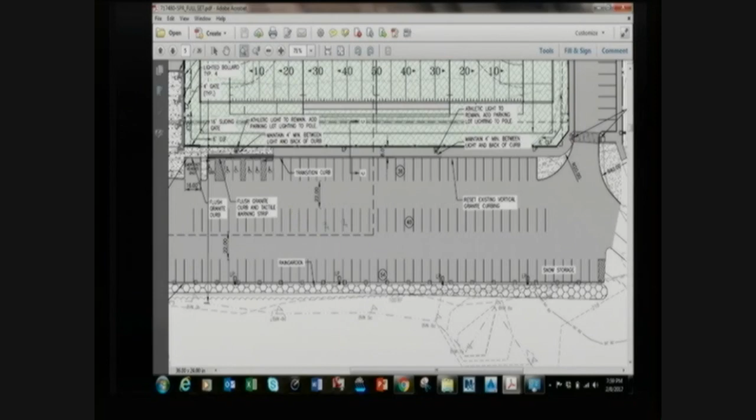So again, it's the same field configuration with all sports on there. Left field at 185 for the foul poles. The building configuration is the same spot, same size. We are showing the parking configuration, same as I think we were showing it before, with 130 or so striped parking spaces down there. We've got accessible parking here.

One change I will note in this area is we used to have the vehicle access right over here, so you had to drive through one of these columns and make a really hard turn in. We changed that to here, so you come in just straight in from the parking lot, which is a way easier movement to make. And that's why we have this little island here.

So we're separating that from the handicap parking, and there's also a little bit of a grade change there, a little curb ramp back down to get to grade. There'll be a sliding gate there, 16-foot wide, that'll slide this way. You can open that up and just come right on here, so you don't have to worry about that anymore.

We're showing a ticket booth here, and we're showing a concrete area. This gray hatch is supposed to represent like a stamped concrete or a colored concrete, just decorative paving, for aesthetic. We have five columns we're proposing like a brick-faced column with a decorative cap on top, like a pier. And then we're showing these other kind of blanks here as just flat, like paver blocks or something that would be flush with the ground, but it would give it some interest in that area.

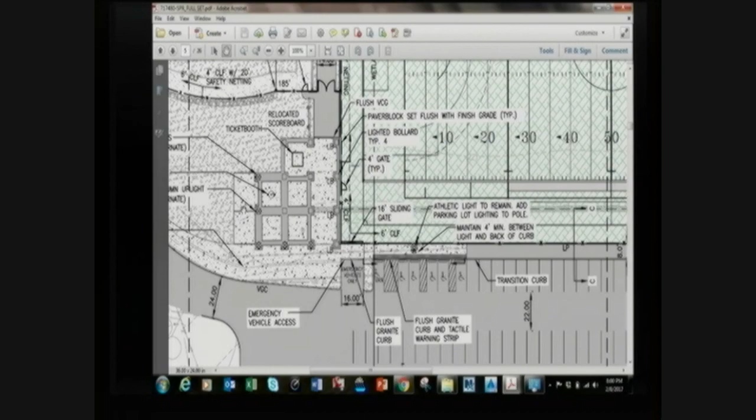We'll get into costs later on. There are some value engineering kind of cost-saving options that I think we need to go through. These pillars and this kind of area, there's some options for some cost savings, I think. That's really the nicety area here. It doesn't have a lot to do with the program, but it's a really nice feature if you can get it.

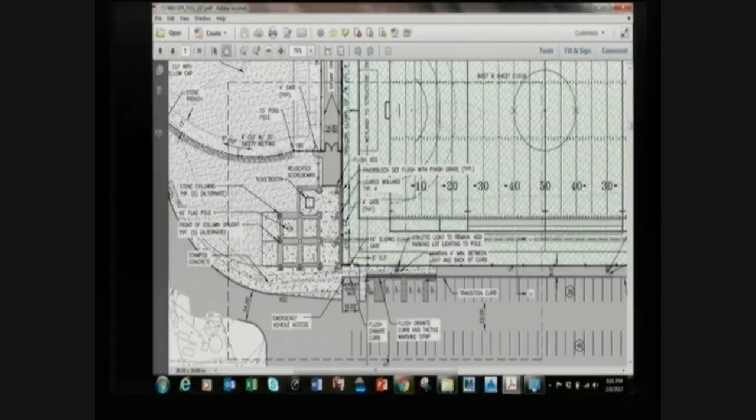So again, just going back, the emergency vehicle access, I'm kind of thinking through this. If we were to remove the bollards or the piers, whatever we want to call them, and leave the gate over there, at first I was thinking that would be my wish initially. But now, thinking through it, you do have to go over an area where people may be congregating, a ticket area where there's going to be pedestrian traffic. I think this is the best place in this corner of the field for that type of use anyhow.

Was there an impact on the cost estimate? No, cost neutral. It's basically moving the gate here and putting it over here. There might be a little bit more curbing or something like that, but I don't think you'll ever see that difference. So once they pull through the gate, they can just go around the field, drive wherever - yeah, you can drive on the field.

And there's another gate on this side here as well. Based on some feedback we had gotten before, we made this movement a little easier too. At one point we had the gate maybe over here, so you had to kind of come and make another weird hard turn there. So we have this whole area fenced in, we've got a curb cut so you can get up the curb, and we've got another sliding gate here, and then another sliding gate here. So you're basically just coming right in - it's a nice smooth movement there.

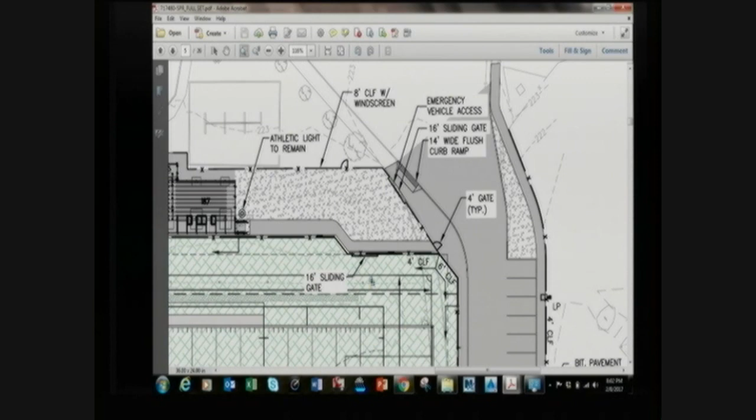Talk a little bit about the grandstands. So, like I said before, Chuck was involved and Carl was involved.

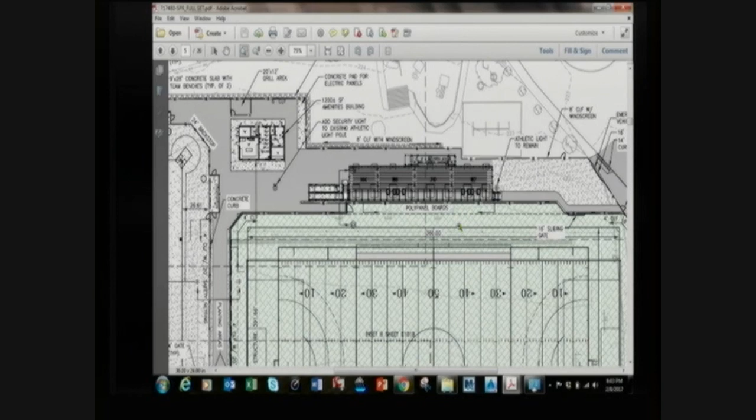The issue we had was that with the configuration of the grandstands we were working with, in trying to keep this light pole, which is currently there, in place, we weren't able to center the grandstands on the field. So we reconfigured it so that we could center the grandstands on the field.

But in order to do that, we needed to reduce the size of them, and at one point we were down close to like 600 seats. And we got it centered on the field.

Don't pay attention to this dark line here, that's something else. It's really this 50-yard line that comes straight through this section and then straight through the ticket booth, so it is nice and lined up here. Press box. Going right there for tickets.

The decision was made to not move this light. It would have been a cost to do that, and then it would have also not been symmetrical anymore with the other side of the field, so you theoretically would have wanted to move both. It was a ticket of like $40,000, I think, to move those poles.

So what we ended up doing was we kept that smaller configuration here, but then we added on another section on the left-hand side. So the press box is technically off-centered from your whole grandstand, but there's a local center — the press box and center section are centered on the field.

One thing I noticed is the center section previously had you entering from behind. So in order to gain seating, we're now just entering on the ends?

So we have an access point here on the end, and another one here. This one's going to be more for egress.

Although we're not showing it completely accurately here because we're going to pave — you're still going to be able to walk underneath this whole thing like you always could. We're going to bring this pavement out so that you can walk underneath and access it here.

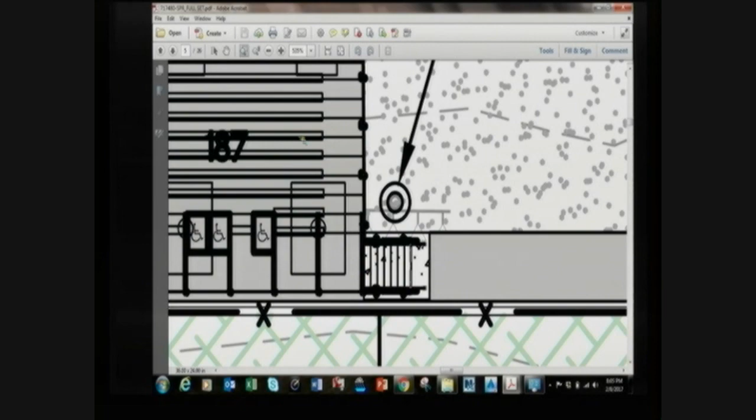If you wanted to get a little more exercise, you could come down here and go up that staircase instead. Or you can just come over here — there's a staircase here to access this. This is an elevated platform; it'll be elevated about 42 inches off the ground.

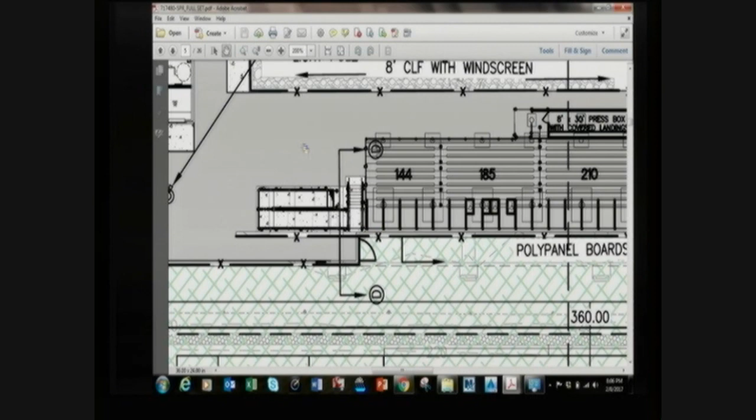So you access that here, and this is your accessible ramp, which comes up here as well. So you really have two access points, just one on either side now, but you still have that whole open space underneath.

So I think it looks pretty nice. It's a little atypical, but working with the site constraints that we have, I think aesthetically — you're looking at that center section, you're looking at the press box, and you're on the 50-yard line.

That's actually the way the Littleton community has typically watched sports at that field — there's a big pile of humanity down on this end, and a smaller part of humanity out to this side of the bleachers. I don't know why, but that's just the way we've done it, so I don't think it'll bother anybody. And actually, you're closer to the amenities building at that point, too.

One of the things this will end up benefiting is, with that new section closest to the concession area, the band likes the acoustics from that end of the bleachers versus down where the quote-unquote fan section is at the other end — so it'll keep the band and the band director happy.

One thing we did need to do when looking at this was, we always had this little bump-out here. At one point we had that at 10 feet, and we needed to decrease it down to 8 feet in order to make this work. We wanted to make sure we had separation from the swing set area, trying to get separation between that.

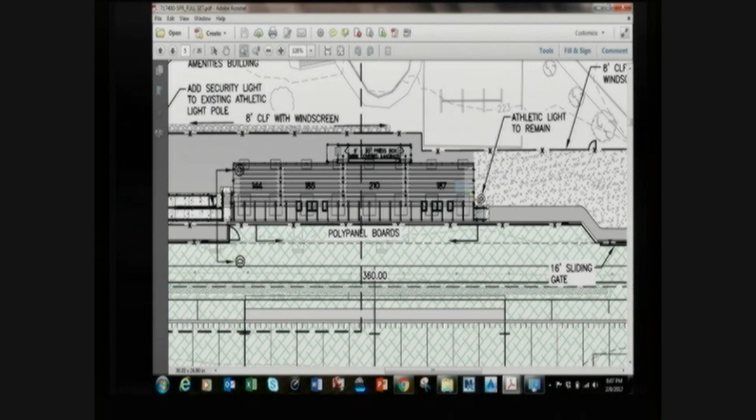See how close we are to that existing light pole? We needed to bring that down away from the light pole a little bit and get a little bit of wiggle room so that we could actually build it. But we still have — you've got your 10-foot run-out from the end line, since soccer is the widest sport that was showing on this.

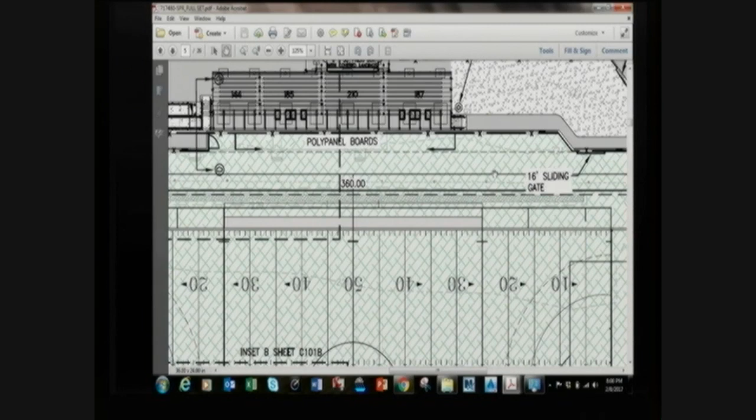So you've got your 10-foot run out to that dashed line, and then you've got another 8 feet after that. So from the end of soccer to the end of the actual turf, you've got 18 feet there. And then another 6 feet for football, because we're football.

Well, quite a bit more, what it really actually is. Cheerleaders are right at that for football games. Well, this is the cheerleader area, so. Well, you can have more for football. You've got a lot more, actually.

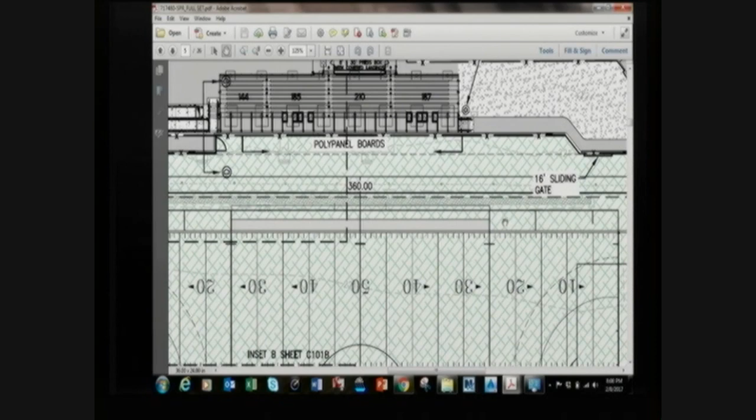You've got about 30 feet, probably like 30, yeah. That's plenty. You probably get about 36 feet between your football line and the edge of the turf there, the front of the stands. I mean, this is the coaches area, you're down past the players team area. So you've got quite a bit of space there. Okay, good.

Okay, I want to zoom in. I want to go to another sheet here just to talk about this area. Here we go.

Nice being able to zoom in and not have boards and have people from 30 feet away trying to point at it with my pencil.

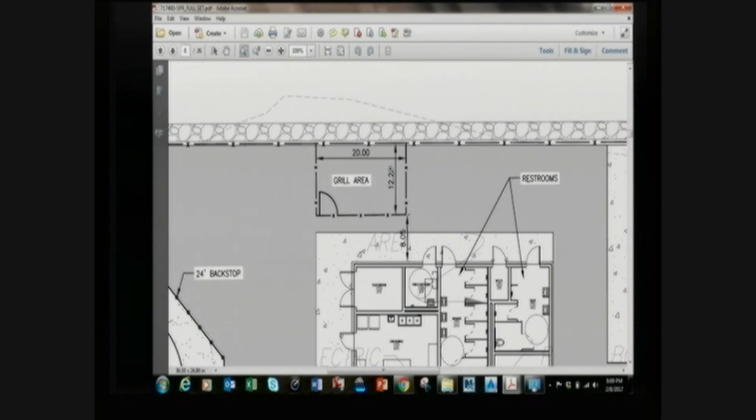So we've got the amenities building, we've got the few windows here, apparel and the concessions, and then your restrooms behind here. We did add in a grill area, which we had talked about at one point, fenced in with a gate. I think our utility plan shows a light pole in there as well, so you can actually see what you're doing at night. That'll be new.

And then as far as the softball infield area, we have our basically enclosed, we'll call them dugouts, but it's really an enclosed fence area with a concrete pad and a player's bench. It's really just no roof structure on it. And really, if you wanted to ever add one, you could probably easily do that down the line, 'cause you've got the concrete pad there, you could set one right on it. Eagle Scout project, yeah, something like that.

So what we're doing there, and it's the same for both sides, is the whole thing's fenced in, so the fence comes down the line here with safety netting down that whole third base line. We're putting in a gate so you can actually get into the field, we're putting in a gate here so you can get into the dugout area. We've got a gate on the other side so you can get in from either side, in or out. And then we've got a 6-foot chain link fence in the middle with 3-foot openings on either side, no gates or anything, which is fairly typical. And again, the other side is just a mirror of that, for the most part.

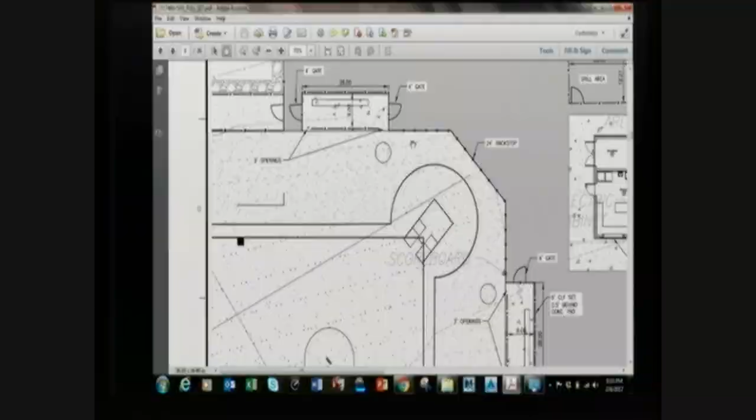We've got a 24-foot backstop. We do have some presentation materials that we can show different options for backstops, but typically what we think of as a clean look is to do just a straight vertical backstop without the overhang. It's kind of a cleaner look, and the overhang actually adds quite a bit of cost. It can add like $10,000 of cost, which is kind of crazy when you think about it. We're good.

What else? Let's see, can you just bring us down the right field, yes, there you go, the old entrance area?

So we did add in this, it's a 12 by 60 foot, I'm calling it a warm-up area slash bullpen area, so that's inside the fence to the field. Yeah, it's fenced in, but there's a gate here. So spectators are on one side of it, the field is on the other side of it, but you have an area where pitchers could go out and warm up with the catcher and then protect it. Yeah, exactly.

And we could have made that a little bit longer, but we've got that main gas line here, the main water line, electric line, and we're really trying to be careful about where we put fence posts over there.

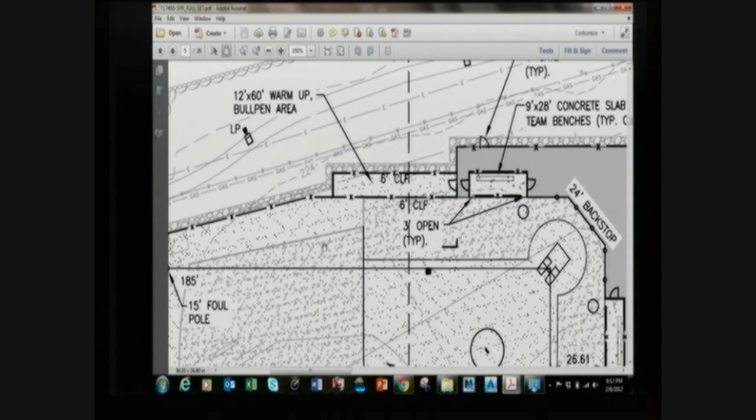So, and what we've done for the infield is, at one point we had this whole area here as a skinned clay infield. But after some debate in the office of the best way to do that from a drainage standpoint and just maintenance and aesthetics, what we went back to was having a grassed area around it. What I didn't want to have happen, because the way that this thing drains, it drains towards the edges and towards the backstop, and if you've got clay draining towards your pavement, you could have it wash out on the pavement. It could be kind of messy.

The downfall with having the grass here is that some people think it's a bit of a maintenance issue. It's a little bit hard to mow and maintain it, and it gets a lot of wear. But I think it's the better of the two options.

Is it? The grass in that area, yeah. I see it both ways. I see a lot of it being grass, and then I do see it sometimes just being all skinned in clay.

So we are showing that warm-up area as clay, because that's going to get a lot of abuse. I don't think grass could really live in there. And then we're showing a clay warning track around as well on the outsides here.

We've got a stone trench drain along the outside for drainage purposes. Again, we're showing that safety netting 20 feet tall here, safety netting 20 feet tall along here and along the other end line.

What we're not showing is sometimes folks want taller netting behind the field goals, because the 20-foot netting will catch some field goals, but it won't catch all the field goals. Not an issue for little kid field goals. I think I mentioned that once before, but it would be an issue though. We're pushing the budget as it is, so if it is an issue, we've got plenty of little kids that love to stand behind the goal post and shag, so believe me, we'll be fine.

So that's pretty much high level right there. One more thing, just to touch on this parking area here.

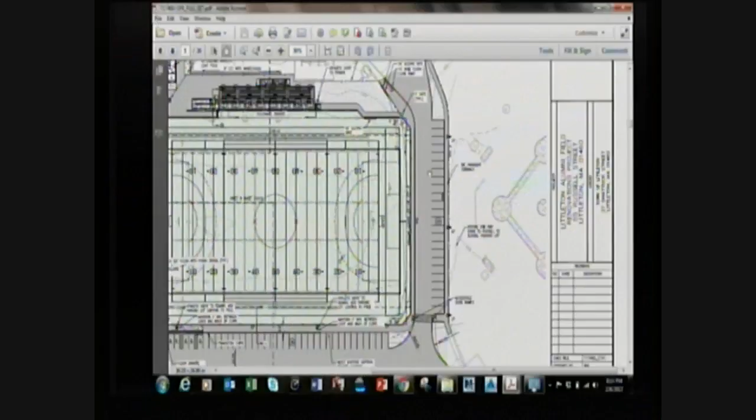I don't remember where we were the last time we met with this group, but there was at one point some discussion of whether this was going to be parallel parking, or were we going to do perpendicular parking where we'd have to shift the road and put the parking back in place. What we landed on was to do perpendicular parking. We were able to get twice as many spots, and it's easier to perpendicular park than it is to parallel park.

Oh, good. Yeah, for a while we were showing permeable pavers along this whole southern edge here, and we were trying to think of ways that we could detain or treat stormwater coming off of the pavement. Although it's pavement now, we're putting new pavement back. We need to manage that to the extent practicable.

There was some concern, I think facilities was concerned with it, and even conservation was concerned with it, as far as maintenance, and there were just a lot of issues with having the permeable pavers there. So what we did was we took them out, and we are proposing a rain garden, which is basically a little depressed vegetated area off the edge of the parking lot instead, which I think in the long run will actually probably function a lot better.

And ConCom, as well as the highway department, preferred this over what you had before. I think it's going to look nicer, and it's going to provide more benefit. So that's what we're showing there.

We're showing a timber guardrail along there with some lights. We've got parking lot lighting here, and here. We've got lighting in the entranceway. We've got field lighting here. We're going to do basically a floodlight somewhere over here just to get some light on the infield, not for playing, but just for security.

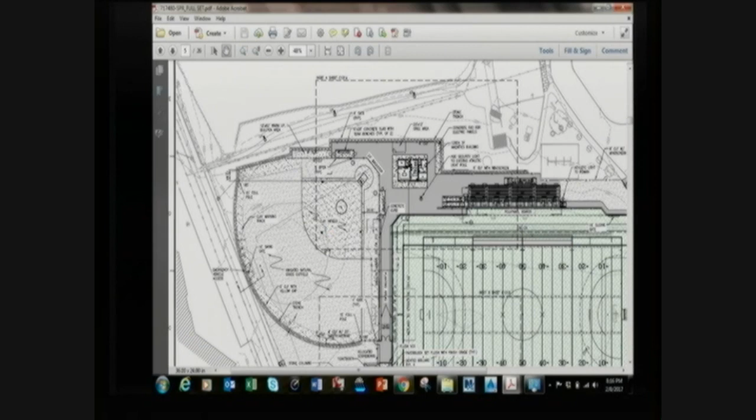At one point, someone said that during games, sometimes kids like to go out there and run around. And then we've got some pathway lighting back here as well. And then we're going to have wall pack lighting around the perimeter of the building so that we have nice light over here for accessing the restrooms.

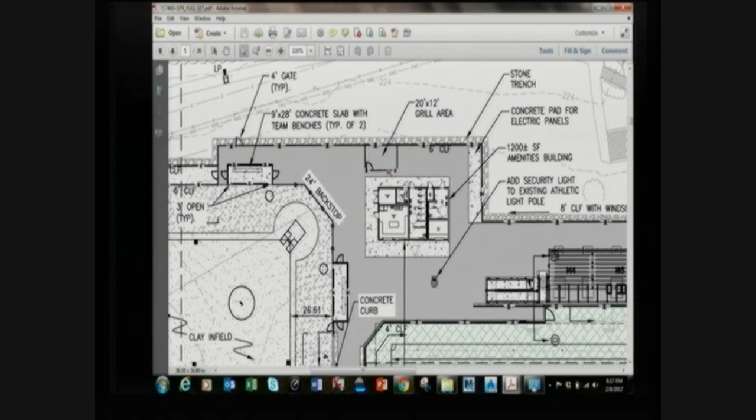Just want to leave that up, John. Sheila, do you see with the grill area, John, if you could, behind the concession area, they designed a little fenced-in area for the grill area? Oh, that's good.

That'll be nice. I think it would make sense to turn over to Sal. We do want to come back and talk about details, but I don't want to get hung up on that and not have a chance to talk about building stuff. I just want to get the input of the board as to that bullpen area that you added. Yep.

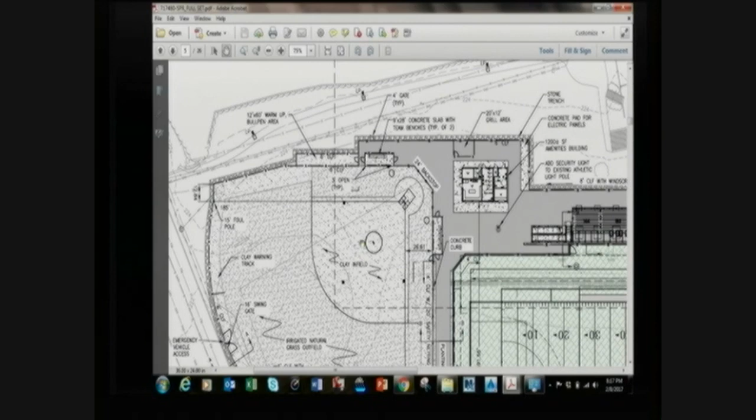On the third base side, in theory, if there was a pitcher warming up, they'd come out and down to the outfield grass here and warm up right along here, with somebody protecting the pitcher or catcher, whoever's back was to the batter.

On the other side, there was some conversation from the softball folks about where they'd be able to warm up their pitchers. So one of the things I was proposing was to kind of square this off, not necessarily create what you've created here, but more square this off.

But one of the restrictions you said was the utility lamps. Did I step on you? You're wrapped around the HDMI cord. Awesome.

I just wanted to throw it at the board to see if that's going to be kind of like a little alley, and I don't know whether or not that's going to be beneficial, to have that alley there.

What's the alley? It's a clay area, coming out of that dugout, and the warm-up area where the pitcher can go out and warm up—just throw with a teammate to get ready for a pitching change or what have you.

Right now they basically go out into the outfield. There's a ton of space, but along the third base line.

So what's the question—is the bullpen good, should we keep it? I guess that's what I'm proposing to you guys. Do you think softball wants to keep it fenced in? Yes, I think having one fenced-in area for people to warm up in, we don't have to worry about anything. If it's built in and the cost is there, I think we should do it.

That was one of the biggest reasons it's kind of 50-50 when you talk to softball people, if they like the field the way it is. The people who didn't like it, or weren't concerned as long as they didn't lose a field, their concern was that they had no place to warm up. So I think that's a good addition for the softball people.

That's certainly a benefit for the first base dugout. Just gotta make sure that's up against our fence—there's no home side way down there. We don't want to, I mean, you say that and you're liable, but there's no reason why, if it wasn't being used by that team on that side, the other team could make the sojourn over, and it is separated from the dugout, so they could do that.

You know, having one is better than having none. Having two would be ideal, but that's not gonna happen. So let's have one and they'll work it out.

You put one of those net things up, like the high school has, on the other side? Is there anything that would stop them from doing that, like a batting cage or a pitcher warm-up area? It'd be in the field of play, right, so how are you gonna warm up your pitcher then if you're in the field of play?

Well, like they do now, they go out deep, go foul, out in the outfield, and they just have a spotter. There's plenty of room. From an actuarial point of view, in a youth softball game or even a youth baseball game, it's fine—it's not like they're smacking the ball and yanking foul balls all the way down to the corner that's gonna rip somebody's head off. It's just rolling, if it ever gets there at all.

I feel like if softball's happy, we're good. There's some electrical over there for a pitching machine, and water to hose down the clay.

With some of the issues that—well, this whole softball field will be irrigated, so we can either have quick connects to water down the clay, or we can have them design it so the clay is automatically irrigated.

And we could do it either way. It's a little bit of an added cost, I'm sure, to irrigate the infield, but I think what they typically do is they just have larger heads around the perimeter that shoot inward. So I don't know if you guys have a preference.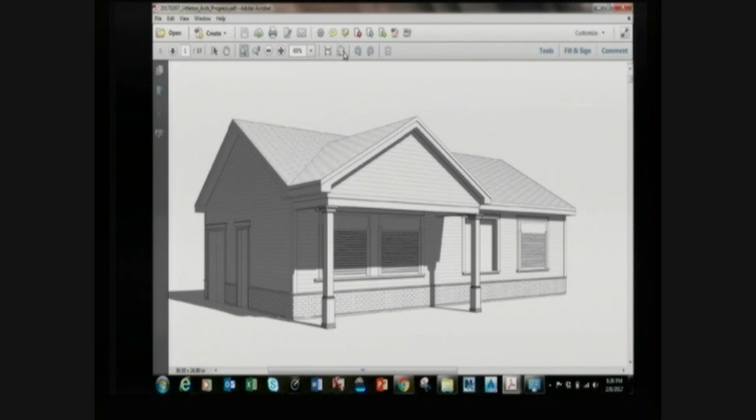Okay, so then these are just sort of the construction set as it develops - typical mounting heights of things, kind of regulatory pages.

So then getting to the plan as it's evolved, we got the comments from last time. We've removed the counters that we were showing before, because we were directed that it's just stainless steel tables. Yes, we just have to confirm some of the sizes and work with you as to the layout.

As to what sizes - I don't know, do you have them already? We already have them in there, yeah. Okay, so if you can get the sizes of them, we can show you how they lay out, and it might mean you want to buy another one if we have more room, but at least show what you have currently.

I can show you the interior elevations of the room so you can see what wraps around it, but just in plan there's a refrigerator, a freezer, hand sink, 3-bay sink. The grease trap will be mounted on the floor here.

Anything we could put shelves on standards there, or we just thought that maybe, depending on how you're gonna display - there are hooks on the wall, slat wall, is it something that's done afterwards? Is it something you want us to program and show what it is, or is it this group or someone else we need to get input from?

I think we could figure it out, I'll get input. I know Gary - yeah, I think Gary runs the apparel, he'd want to figure out what he'd want to do. It's something easy to do afterwards, but if we want it in the contract, we just need to know what you want. Right.

What's the finish in there? Is it just drywall? Yeah, it's all drywall. Everything inside here is impact-resistant drywall.

If he wanted to add shelving, they could easily do at least one wall with shelving to store on, whether it's wire shelving or not. The only thing I'd say about wire shelving is if you're going to buy units, you could get them for about half the cost of what a contractor would charge. So if that's the solution, just box them and get them afterward from Uline or your supplier. The town's probably got a contract with them, and you can get those things a lot cheaper than what a contractor is going to charge.

Even the stainless steel tables, when we do those, we tend to recommend keeping them out of the contract. If you have to reserve money for FF&E, buy them directly, because there's a big markup that contractors put on them.

So quick question though, I think we discussed at one point too, the concession for the condiments being over on this side. Over here? But I'm not sure how that will work.

So right now we put a folding table out, which could still work with this counter here. Why would you want it still over there? Just because we've always put it over there?

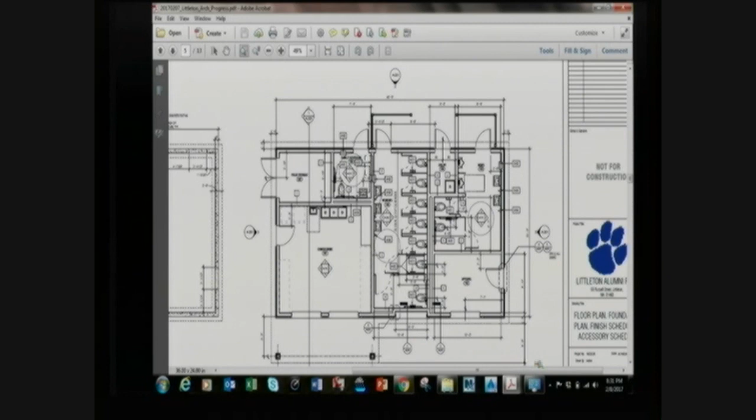No, not just because of that, but I'm thinking about the flow of people and getting them out of the way. Like they come, get their stuff, and then go over there to the condiments. If you leave it to the right, they get their stuff, step off to the right, do their condiments, and then head back to the seat, keep going to the right. If you put it over there, they've got to go there and then walk back across the line to get back towards the bleachers.

That's true. All right, and if we have that built in, we could still put the condiments there, you don't have to use a folding table, but it gives us the flexibility of doing that rather than building it in. And I'd say if you build it in on this side, you're going to lose space out of the concession building. Here we didn't lose space because the restrooms behind it had some extra space in them.

Okay, that looks good.

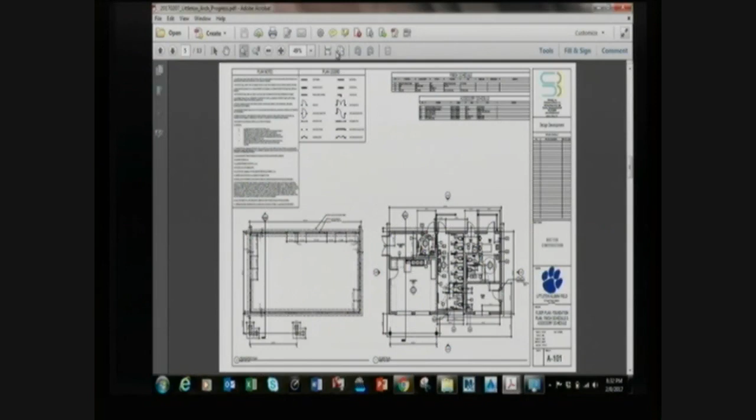And the exterior on that wall that Sheila was just talking about—never mind, I got it right here. Never mind.

This is the ceiling plan, which is very basic. The soffit underneath the canopy, we'll show some lights in here—just notice that they're not there yet. But all of the ceiling is drywall in the concession building, which tends to be more cost-effective than doing ACT.

But we will show an attic access hatch, not a pull-down stair, but at least a hatch to get up there to service the units. We'll probably show that in the middle of the storage room, or we might put it in this area here, in the apparel storage, because we want to get back as far as we can to the high part of the roof, and rather not put it in the restrooms. So we'll have to check in section, but probably would put it around this area here.

So the highest part of the roof is in the middle, right? Right, so it gets higher here than it is in this room, so you have more headroom when you come through that hatch.

You don't want to do it in the concession area? We could do it in the concession area if you wanted to, I don't have a preference. But if you're looking for the highest part, this would be the best place for it, to have the most headroom when you came up into the space. Sometimes people don't want it in the concession area since it's not something that's accessed very often, but if you have to change filters in the fan units that are up there, so there will be some access.

Get boots on your sinks and countertops. I mean, it would not be accessed during the game, right? Sure, no, no, of course not.

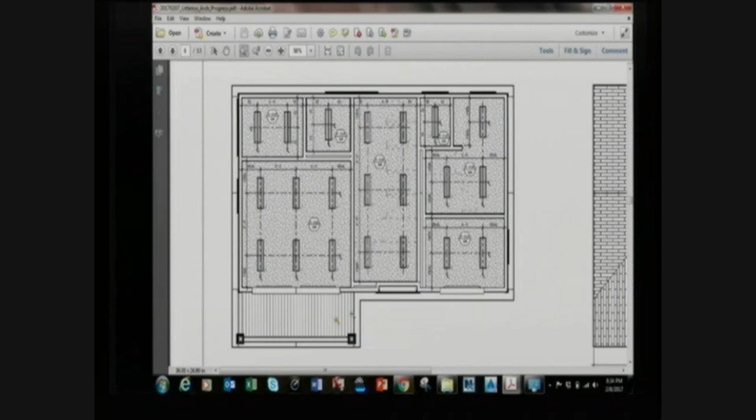And then the ceiling here, it's like AZEK, PVC soffit boards, with some can lights.

How much coverage is over the... that's just over the two service windows, correct? So how covered is it over the condiment area? Just a bump out, just the recess and then about an 18-inch eave. So this is the edge of the eave above.

We do have room over where you were looking to put it, Sheila, if you're thinking of foul weather. It's fine where it is, I'm just looking but if we did decide to put it on a rainy night, if you wanted to put condiments out, we could do one of the pop-ups we have, and put a table underneath that. You can even put the pop-up here next to this. Right, I was thinking of that, if you're on a rainy day.

Then this is the ticket window as we have it now. Currently, I'm not sure I'm a fan of this, it's what's in the drawings. Because these are sliding windows, your transaction area is kind of small here, so I was thinking maybe just a double hung window might be more appropriate, or we could do a casement window that opens all the way out. Something that's not like the ticket window, sealed with the hole, something that looks more residential. But looking to you guys as to what your thoughts are.

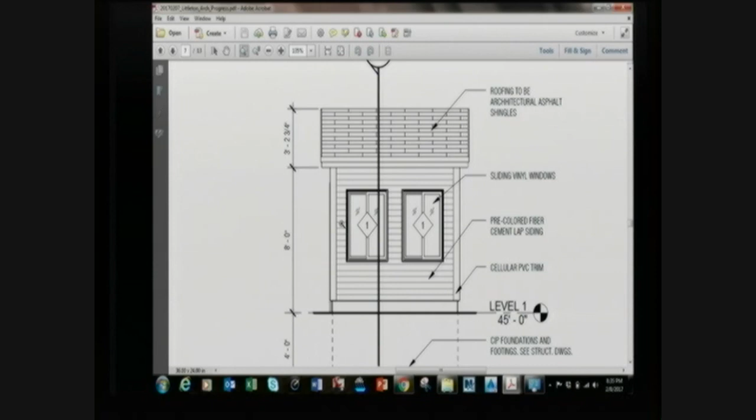We have sliders now and they have to kind of bend down in order, right? So I've done double hung now, and that's always the window debate - do you bend down or is it narrower? Or do you do one bigger window rather than the two? That's another thing you can look at also. I think it's good to have two stations. What if you hang the window higher? That's what I was thinking too.

Could you do a coiling window, Sal? Why not, you could do a coiling window. The window still has to be where it is for ADA, but what about like the concession roll-up window? You can stand taller, and it could be two - a double hung, stainless steel so you can open it more. We could do the stainless.

Then, there can still be two lines, but why not one big stainless steel open-up window? Do you know what I mean? We could do that, so basically it would be the same size - not roll-ups, stainless steel, the same thing as the concession window. Same as the concessions. You do one big accordion window, just one big one with two stations at it. So it would look like one big roll-up window.

Wouldn't give you the residential look. No, it wouldn't give you the residential look. But it would match that though. Well, I mean, when you open it, it's going to be up - it's only when it's closed that... so that is a possibility. It would just be one of these that would have two stations inside it, and it would roll down and seal instead of being glass.

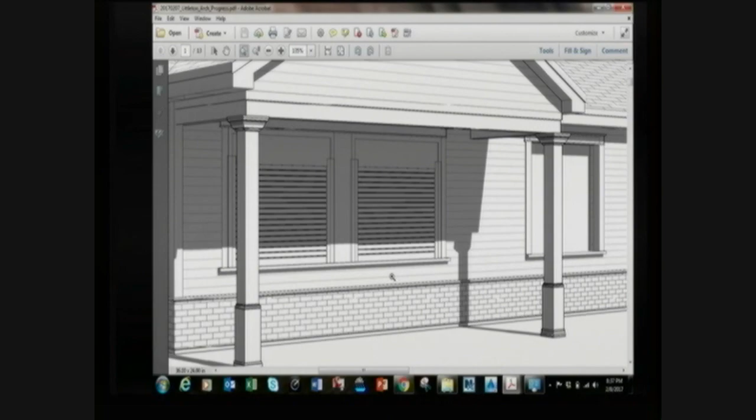I guess it's a matter of aesthetics. I mean, cost-wise, I would imagine that this is gonna be more expensive - probably more expensive. Not leaps and bounds, I would say, not a lot though. And from a logistical standpoint, that might be a lot better, because like you said before, it's either you're on one side of the window or you're bending down. In this case, you're just opening it. There's other types of windows, but they get very expensive - it's gonna be more functional, like a NanaWall type, stadium press box window that folds out away. I would opt for that.

This isn't gonna be ugly, but you've got something sticking out in the way there. And, I mean, you can paint them, right?

The roll downs? Can you paint those roll-downs? You can get them, or you can specify them in a different color. So, can we put the tiger paw on it? Yeah, they'll do anything.

And we could do them all as a color instead of stainless steel. It would be anodized aluminum with a powder coat, as opposed to stainless steel, so they match the trim color. That actually would be pretty cool. Yeah, that would be nice. Great idea, wrap it up.

Everybody good? All of them, even these ones here? I would do it on all of them. Yeah, make them all the same. Anodized aluminum, that's pretty cool. Trim color, yeah, it's gonna look nicer.

Okay, very good. The other thing is, this is always a debate as to which way you pitch the roof. Right now we're showing it pitching this way, and the question was, were we thinking gutters and downspouts, or were you sheeting? How much of a soffit?

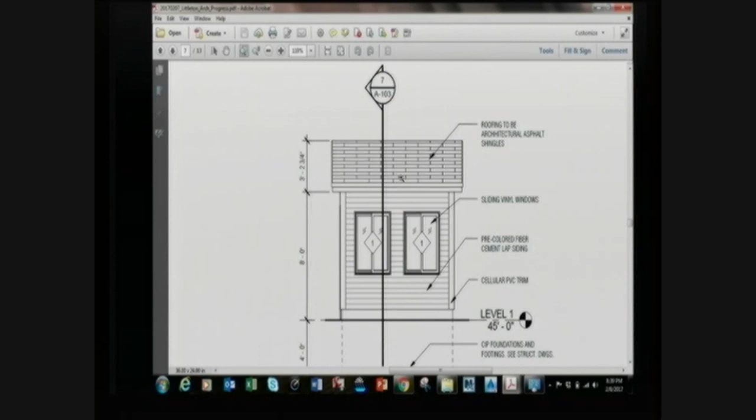The issue is when you overhang the angle part, it's so high above you that the amount of rain protection it gives, unless you go really far, is limited. So there's no good answer unless you really extend the roof like 4 feet and put brackets and columns to really get under cover.

I mean, they're gonna be out in the rain for the next 3 hours anyways. That's kind of... and you're there once, it's a quick transaction, you're done. You know, you can go to the concession stand more than once. Right, more people go at a time, so you want that cover.

But it's also more to give cover to the people inside, for wind, rain blowing into the counter and onto the tickets — it's more to shield them than the person buying the ticket. But the thing that's nice about the roll-up counter is that you can adjust how far you roll it down. It latches in multiple positions, you could lock it at a mid-point, so if there's windy rain, you could bring it down right to your eye level and kind of limit the amount of water coming in that way. So there's a benefit to that.

I feel like if there's a way to not soak people standing in that one spot in line — even if it's just tacking a gutter and directing it, even to people's feet — I mean, yeah, you're getting wet anyways, but like, my 5-year-old's gonna stand under it and then I'm gonna have to leave, I'm just picturing it from that angle. If it's impossible or costly, that's one thing, but if there's any way to not create a shower for people, that would be nice.

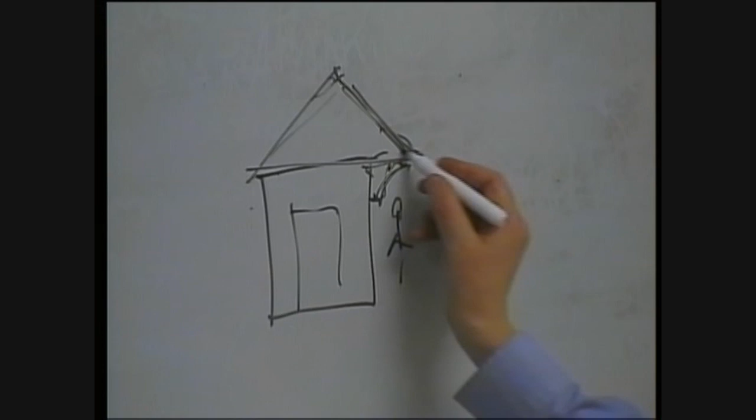I like that better. It's a little bit more money, but we were thinking of making the whole ticket booth an add alternate, just as a package, trying to be sensitive to pricing, so that it's something that could be done later, or removed if we had to. I like the depot design. Okay, we will do that.

Then put a little train in that takes you to the bleachers. Paint some tracks all the way down that little monorail alley system. Monorail, why not? People mover. Good training, they'll hand out umbrellas. Just get some sidewalk, big long golf carts, like Disney, the tow rope.

One other thing that came up earlier was a bottle filler on the outside of the building somewhere, which we were just asked about — is that a donor opportunity, and did we have one? We don't have one currently.

One of the places I think would be easy to do that, and you mentioned a hose bib too, would be right in this panel, between the door to the concession and the storage door. Only because that's our plumbing wall.

So it would be easy to bring the plumbing out, and if we had the hose bib there, the water's already there. We could put it as an add alternate for that bottle filler, or if there's a donor, you could put it in. If not, the water's there for the future. That's a good idea.

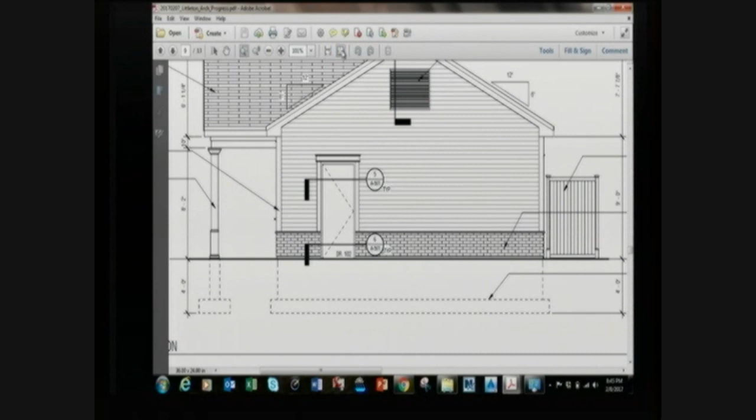This is what it looks like at the concession. We're still showing the thin brick water table around the building — it's a brick veneer, thin brick veneer that wraps around the building, and then the cement siding above. So it's pretty simple construction, but at least it gives a little bit of brick to make it a little bit nicer around the base.

Is that like red brick? Yeah, we actually ordered some samples that didn't come in time to bring today, but we'll have one more color meeting probably where we go through and confirm the colors, and try to tie all the buildings together, that kind of thing.

Then these are just construction details. These are the elevations in the bathroom. We're showing tile up to 5 feet around the restrooms.

So that shows the urinals, the toilets, the mirror and sink. That's the family restroom, the changing table. Then this is the inside of the concession stand. So this is dashed in the stainless steel table.

Okay, this is the side looking toward the left side, the way we're looking at the plan, so toward Jet Field. That's shelving on shelving standards, the door to outside, the refrigerator, freezer, and that's a typical stainless steel table.

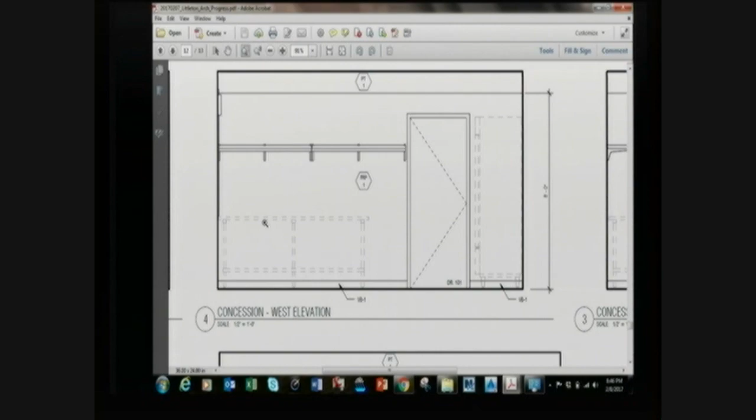I don't know what size you have, but that's like 6 foot, whatever. Is that included, the freezer with the package, the refrigerator freezer?

Are we gonna actually put that in the contract? That's a question for you. Is that an FF&E item? Do you have them already? Refrigerator, freezer, is that part of the contract? That would be good, would that be like a markup situation? Sorry, what you were talking about before, when you put it in the contract and you get paid a premium for that, or do we?

I'd be happy to put it in, it doesn't really matter, we could do it, but we would need a model number that you would want. I would say just make sure there's enough outlets there and the owner will provide it, yeah.

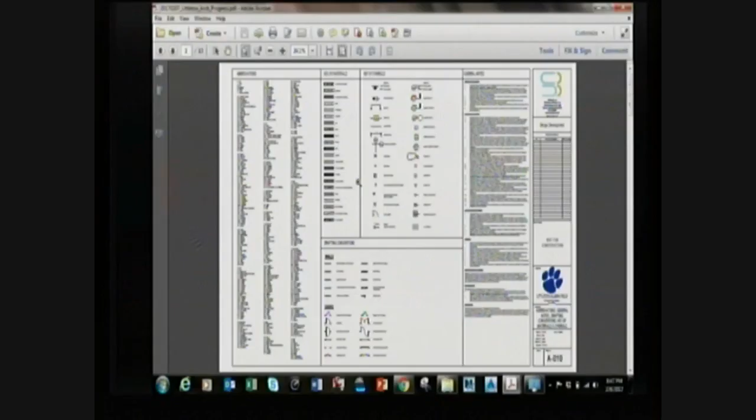We get it. How big is the freezer? That big one, how big you want, that's the point. If we order, we can do it the way we want. Go pick it up in a Red Box. I mean, one thing, if there is a size you want, we still have time to tweak, just go back to the plan.

Like right now we have an old Coke display from when I was in high school, the one that was at the high school. So like 2000, it's just an old fridge and then we have a little freezer, you know what I mean? Like we use that as the refrigerator, and then we just have a little freezer, that's like a good humor ice cream freezer.

We're showing the smaller commercial ones. I can't tell exactly what size they are because I don't have the spec, but I think they're a 30-inch square footprint that we're showing for the freezer, full height, and for the refrigerator, full height.

And that would be shared between us. So you guys want to do it? Well, if you think you want bigger, let me know now, because I think we have room to slide this stuff down to create some more space there if we need to. If they're standard commercial size, I don't think... It's the standard smallest commercial size, not the one that I would get at Sears, you know, with them. All right, that's what I was wondering.

I mean, basically they're the true stainless steel, full front or full glass door. I mean, they're basically the size of a Coke refrigerator, because they make that Coke display.

We're not gonna have that much traffic through that we wouldn't want... we're still typically probably only gonna do concessions for night games, right? We wouldn't be opening the concession stand for afternoon games, field hockey, lacrosse? No, but there'll be more night games.

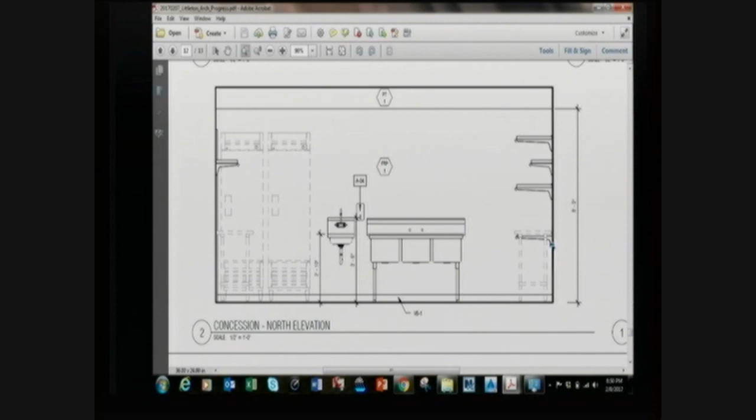This shows the elevation of those areas - a typical commercial hand sink, the 3-bay sink, and shelves on standards on this wall. We've maximized the space, knowing this lower shelf area will have the grease trap underneath, with 3 shelves that are 24 inches deep, and a 12-inch shelf above the table along that side.

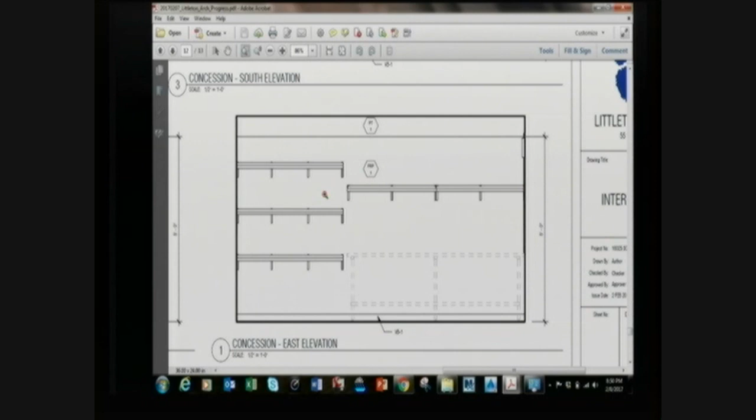That's where we are in terms of the building, and we'll come back with a color palette to get your reaction to when we come back. You might do some colors today - we're probably going to have to do one more meeting that goes through colors, right?

That would be ideal, probably. We've done it in the past where we've done it during construction - it can hold things up a little bit sometimes. It's nicer to do it now. If you guys are available, we'll be available. We'll have to do that soon though, to get as much of that out of the way as we can now.

Where we need to make decisions, if you could float that to me - I'm not looking for people to debate it amongst ourselves, but if we can start thinking about it, so you guys will have an idea of what it is that we're looking to make decisions on.

I also think we need to keep in mind that the athletic director and the school department would have some input, because they have ideas of how they want to present the teams and the programs. So we want to be consistent. I like the colors we have right now - I don't think anybody's talking about changing the colors, just where do you want to put the colors. And they don't know what the colors are.

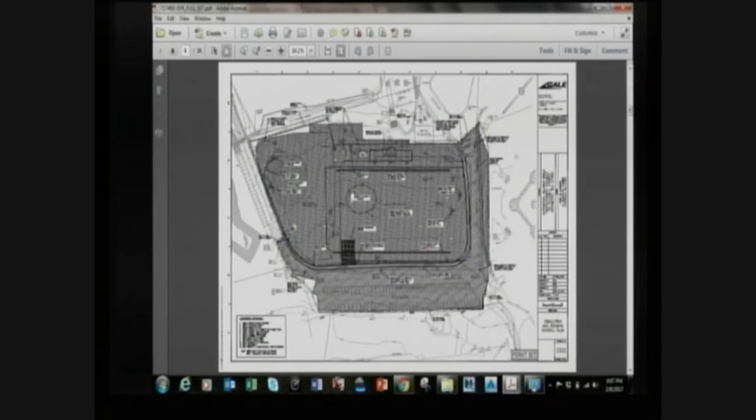Logos in the middle here. I think we had talked about doing a tiger paw logo at some point. I don't think we're showing that in any of Mike's plans right now. No, it's not in that one either. So that could be an alternate as well.

This is the new field at UMass Dartmouth. Most people just go with the green field, it's a little bit simpler. But if you were to do a stripe, you'd just go outside of the soccer lines, outside of the furthest lines. The end panel, no matter what, if they install green or red or whatever, it goes lengthwise along the field, so that's where the color seam would be. There's going to be a seam there no matter what, and then the rest inside all run basically with the yard lines. So it's just as simple as specifying that color there.

Rolling it out, blue — for which line? Where it's red now, see where the red perimeter is? Imagine a green field surrounded by a blue circle, with gold. You're also going to have that right up to the bleachers, you're going to have that whole cheerleader area.

Do you think we really need a border around it, or is it just for aesthetics? No, we don't. It could just be green, like this is — just leave it green.

Here's another one, this is Norwell High School. They just did a typical green field, no border. That's probably 95% of the way it is, just the green. This is just green, then they get the paint out.

That's Narragansett, I like this one too. They're painting all their stripes, right? Yeah, that's turf right there, that's synthetic turf, but they're painting everything. That's in Narragansett, Rhode Island — they just rolled out green turf because they don't want to pay to tuft in the inlays, so they're just painting everything.

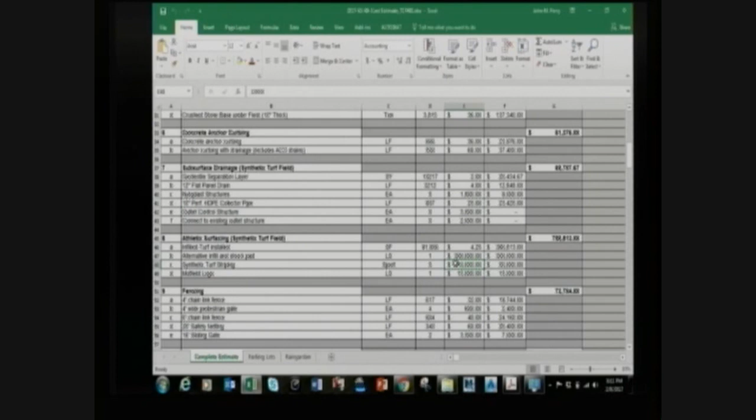That's probably a little bit conservative. Somewhere between 5 and 10, depending on who's doing it and what the contractor feels like pricing it at the time of the bid. Somewhere between 5 and 10 grand per sport. But to paint each sport is...

Less, but you're doing it every year. Well, that's the question. I think it's about $2,000. We're looking at, what is the return? I want to say it's about $2,000 to paint football, so you get 5 years of football.

If you don't stitch football and you paint it, after the 5th year you're costing yourself money. That's the price for the aesthetic of not getting the year-round numbers painted when I do football. You're getting stripes. Is it 2 grand to do the stripes and numbers? To paint stripes and to paint an entire football field with numerals and tick marks...

So I think this is a very interesting conversation that we should defer and have with the athletic director. I, for one, never thought about not stitching in football, but I actually think that might be a very good idea. You can include a price to paint for a certain amount of time.

In Wellesley, they wanted - is it football or all sports? I think it's all sports, yeah. They want all sports painted for 8 years, and they put that in their bid. They're paying for it up front. So I don't know that they're saving anything, but they just didn't want all the sports on there at once. Something to think about.

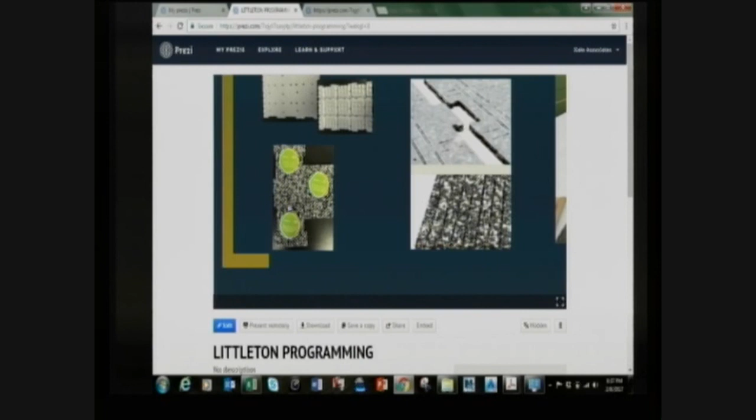I'd almost recommend, since we have to go through the budget and we've got some things to cut out probably, using this because it's a good product. Good opportunity to save some money.

Let me also talk to the guys at Brock, I don't want to push you either way, but I want to talk to them about the system, about using EPDM with a 2-inch pile height and what the results for each of these pads would be.

Testing anytime they want. They've done a lot of testing on all sorts of different systems. You got a really good deal with them. We'll put this in for them, we'll allow you to put it in, but let me get a little more research on the pad, on that system with that pad.

I think we would appreciate a solid analysis of the cost versus the benefit, and see what the differential is, and that'll help us determine if it's really worth it to go up or not.

Likelihood of replacement, maybe my biggest concern, would be durability. Those polystyrene beads - the Brock pads? Well, polystyrene beads in general don't tend to be super durable in any other application I've encountered them in, which has been quite a bit. So I would be interested as well.

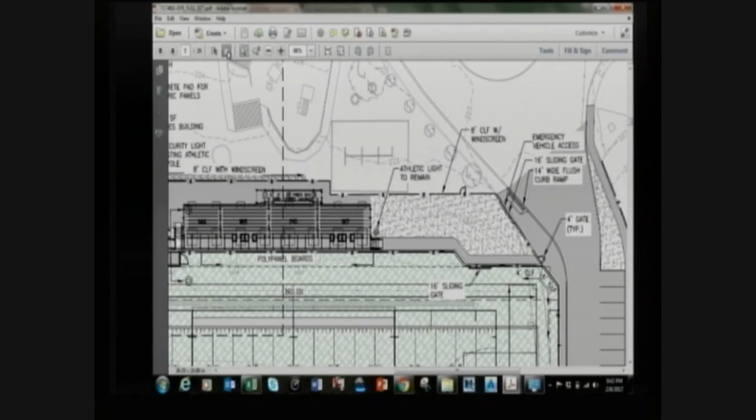Block the grandstands, I like it a little, but we haven't put any designs, it's just gonna be black, but you can put these on any chain link fence. We had an 8-foot fence along here. Is black the best way to go as far as the school is concerned? Well, it's a black fence. Understood. And then the windscreen could be, I think we want to block the sun here too.

One of those items we don't want the markup on, though. Is that something easy enough for the AD to get? Is the windscreen something the owner can take care of, or should it be included? Put it way down the add-on list, or you could include that yourself.

We get them for the backstop at the high school softball, baseball field, so that you don't have fans standing behind them. So the AD has a source. Sure, that's fine. Anything we do through contracting is gonna have the markup on it.

So I think we should just leave it off so that we can retain flexibility, and we'll make our decisions later about what suits us best.

A nice place to put it too, and it's pretty simple, is just around the back end of these concessions. That gives the players a little bit of privacy, and then it also kind of makes it look more like a dugout. And you could put that tiger paw right on there as well.

That's fine, include it, or you guys can do it yourselves. No, I think we should do it all. I think it's an opportunity for both fundraising, but it's also an opportunity for our donor groups, like the softball team, who might want to fundraise to do something they like. So we just let them do it. Also classes with their gifts for their class of 2020.

Was that it for the presentation? That was all, those were some stock ticket booth things we had.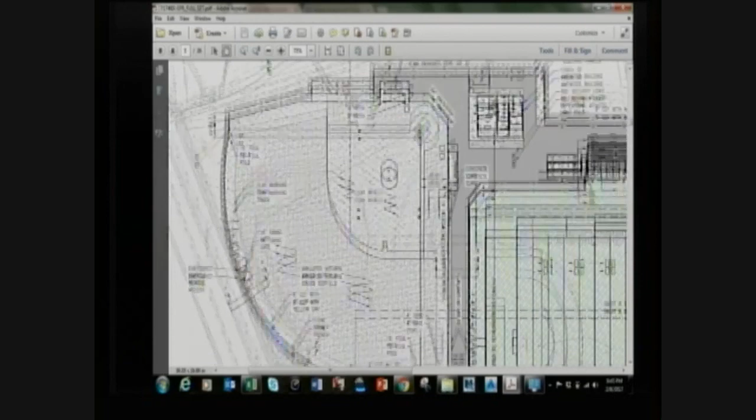This was something here for the entranceway, where we had the columns specified. This is the proposed design. The idea is that with those 5 columns, we're trying to give this some sort of architectural space and presence, almost making it into an enclosure, not quite an enclosure, but to define this entranceway and separate it from everything else, giving it some vertical interest as well.

So we were thinking of something like this brick pier, which costs $7,000 to $10,000 per pier.

Can you go back to the last picture, the field plan? All right, so...

Is there a fence on the perimeter here? No, the fence comes along the outfield here. So this fence is gone, right? That comes along here now. Okay, so it's really, it comes around here and around the outfield, and then your fence is across here and across here, and then it comes back.

There's a gate right here, so this is back open over here. Okay, so this area is all open. You're trying to define that with landscaping.

I'd almost rather look at something like aluminum wrought iron versus the piers. Are you trying to do those piers to tie into the brick of the building, and is that kind of a donor opportunity? Yeah, right, it is a donor opportunity, but at $10,000 a pier... We were thinking of uplighting them on the parking lot side, and then having sconce lighting on the inside to light the plaza area.

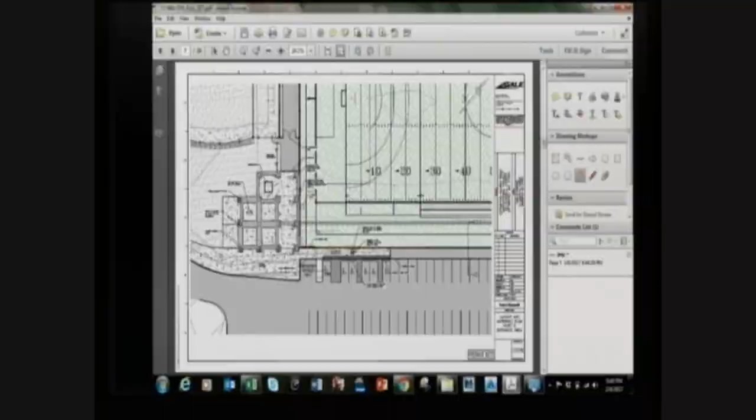Where's my polyline? The outfield fence is there, and that's all grass - grass and landscape over here? Yeah, if we don't put some sort of bollard there, people are inevitably going to drive or pull up on something.

Let me go to the landscape plan - we do have a landscape plan too. Those are opportunities for us, and we're not crazy about putting a whole lot of leaves near the field. The only landscaping in the whole project is right here.

And we're calling out some sod and then kind of an edge with some plantings in here. And we had a whole grand thing that our landscape architect came up with in his grand vision, and we cut that down by about 80%, I think.

So, Mike, are you talking about maintaining a fence line? I thought we were to establish the entrance. Well, this is your control point here. Because you're gonna come in here, gather, talk to your friends, meet up. I was envisioning like an archway.

So there's like a wrought iron something with alumni on it, and maybe two pillars with that on it. Like with a lot of lights and it just screamed like, oh, you're entering this great facility.

Well, that was kind of our idea of uplighting these pillars here as well, uplighting them and downlighting them, but I don't know, maybe we get rid of that and do something more like... the tricky thing too is, right, because you're accessing it.

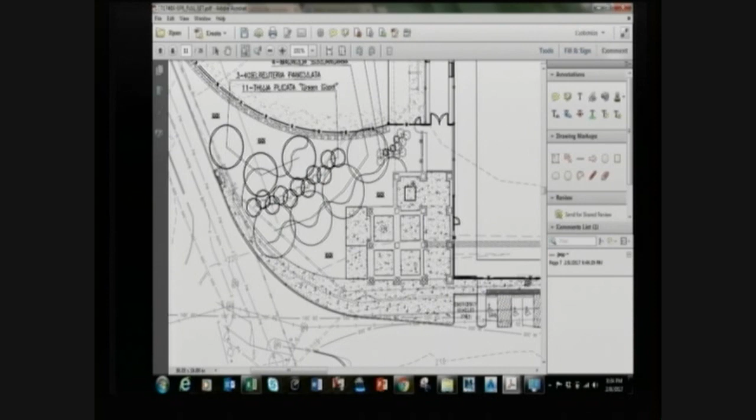I do kind of like Mike's idea of doing a natural berm, where it's somewhat elevated, since we're going to have a lot of material potentially coming out of here. So that's all elevated beyond the ball field. It'd be nice - you could sit there and watch the games if you built a retaining wall on the outside.

No, on the concrete side. Here, on the inside of that, you raise that entire area to be higher than the outfield fence. Yep, you raise all that, so this is all elevated. And you'd have to have another wall here.

Or you just slope it down, you know what I'm saying. But up against this entrance area it would be almost like a sitting wall, which would create some visual interest. That's a lot of money - that wall would be expensive.

I don't know about that. But I do think coming in with a berm with whatever the natural grade would be, and just kind of rolling it up - you could literally roll it up. A couple tiers would be pretty neat.

So the idea is to have just kind of a berm along this edge, raised up, with the whole thing raised up. You guys have any thoughts? Michael and I, we probably have like columns on the other one.

You could bring a wall in kind of like that. Don't mind that little end piece there, make it a looser edge - maybe, I might be wrong on my species name, but it's huge, and then that is raised up. You'd have to - you could still berm up from that wall too, and then down again, so people can climb up.

You can even bring it in here a little bit more to kind of formalize this area, if you wanted to funnel people to here. Oh, this is all berm? This is all elevated, yeah, this is all wall here. Eliminate the columns.

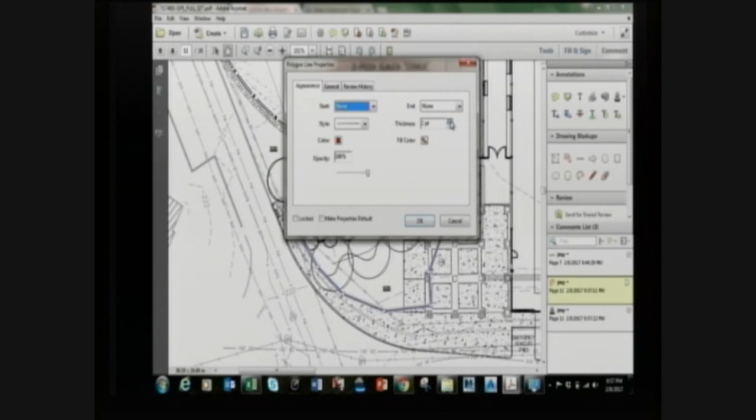Chairperson, two questions: I think it would be great to have seating right there on that berm, that natural seating. My question is, how backed up does that ticket booth get, and is that enough space if you put that berm there? It's a lot more space than we have now. Yeah, I like your curve shape - that's a good question though.

If that's a wall, then it could be another naming opportunity. You could have that wall be something for donors along that whole wall, instead of giving kids waiting for a ride after a game something - maybe a place for them to sit. I mean, I'm using straight lines, so I know.

I mean, literally just like the brick that you're gonna put on the bottom of the concession, that could just be a brick veneer. An 18-inch brick veneer, we've done those with a cap before, with a concrete cap. We'll do a 24-inch wall with a cap on the top so you can sit on it.

Do a nice wall, don't do a brick veneer. Do a real brick, natural, you gotta do a stone wall. Or you could do a Versa-Lok, the type that looks like rock now. But I wouldn't do a brick. The pros from Dover will figure it out.

What did Wellesley do? Hold on, I got a picture. They had the pillars, we can decide this. Actually they did a wall. You want pictures of the wall? I think that would be a nice visual.

I'd get it as high as you can get it, and then just slope it down. Unless you're gonna take topography away from the site, or unless you wanna see the football field when you come around the corner, and that's gonna take away from the vision of the football field.

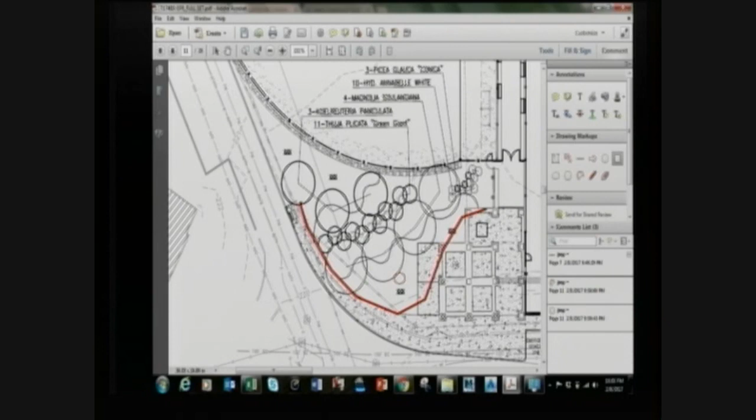We could shift it down a little bit because we've got our sewer line coming through here, and we're really snaking it between our scoreboard foundation and that. So where do you run the sewer from there? You run it right down the concrete pad? I will show you.

We could move that though, because we're putting that in. This is all new sewer line, it shouldn't be an issue. You have no foundations for the pillars, it's not gonna be an issue, but the pillars aren't there, so it shouldn't be an issue.

Listen to Maggie. Yeah, so we can maybe bring the sewer line closer to there, it's pretty deep. So the flagpole foundation and the pillar foundations are not gonna be there, right? But you will have to put a flagpole foundation right where that sewer line is.

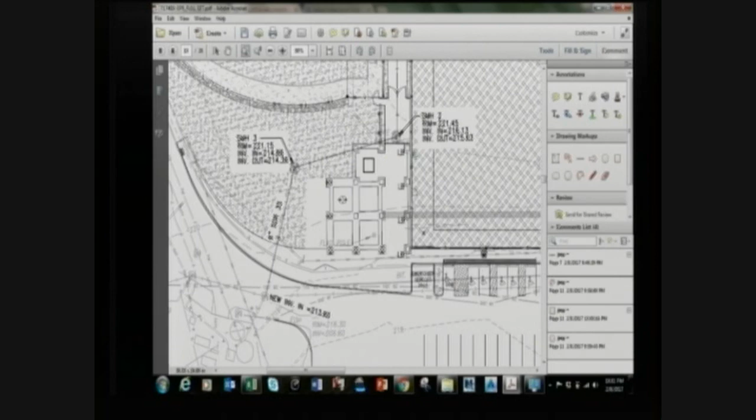But no, the sewer line can shift over now. Guys, let them go fix it. Let's go, it's 10 o'clock, come on. Seriously, they'll figure it out. They're the pros from Dover, they don't need our help.

The pros from Dover. All right, we'll figure it out, so we like the wall better than the columns. That's what I'm getting here.

Okay, apparently you guys are gonna figure this out. We'll figure it out. What else? We're gonna be trapped in the office all day. Can you specify? No, you don't have to go to work tomorrow. Not essential. Where's Maggie? Essential? Really? We're all, yeah, we go to work.

Will you guys put native plantings in? Do you do native plants, like especially the rain garden? I mean, I'm sure Concom probably already requested that, definitely, especially in the rain garden. But I know, it's just nice. I'm thinking of it from an aesthetic standpoint too. What else is essential here?

I'm on the wrong page. All right, there's a couple old people on that. Do you have any lighting issues? There's a couple old people on that committee. When you finish up here, slide over.

With the lighting, yeah. Field lighting and all, heavy, all different dates. What else we got? Oh, cost estimate, pass that out, right? We'll try to wrap up pretty soon.

Item 26, we were carrying an item in there for lights on the existing path from the middle school to the elementary school. That's really kind of outside of the scope of this project. It's nice that we could put them in, probably, but if that's something that the school or the town could do as a separate project, that's probably a possibility.

The ticket booth, you just do that as an alternate.

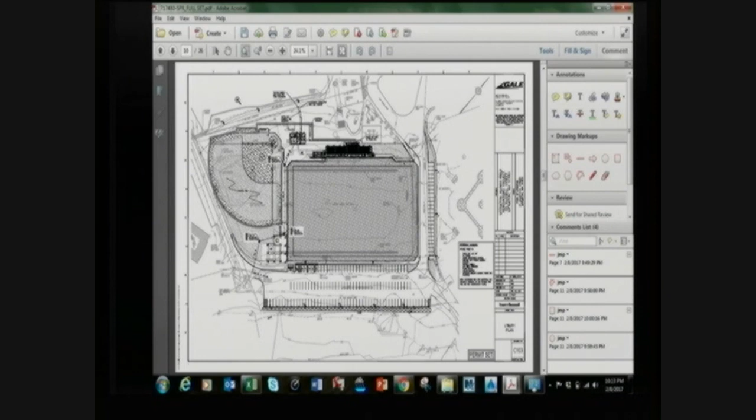Plantings, you do that as an alternate. Yeah.

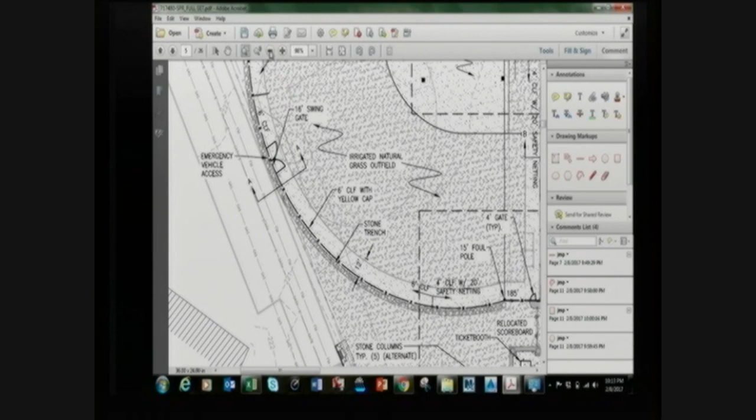We're gonna be on a 16-foot swing gate. That's at the softball field because it's curved along the outfield fence. It's emergency access, so we can't do a slide gate. It's two sevens, so it's just two that open. Two 7-foot, yep, that would call it 16 foot, but either way, instead of a slide gate, they were doing that.

The plantings, it looks like in the rain garden, you don't have any plants for the rain garden? So is that something that can only half go away? I'm just curious. Those are under item 34. Oh, got it. Okay, thank you.

Rain garden without plants is pointless. It'll just wash away.

So add these up, right.

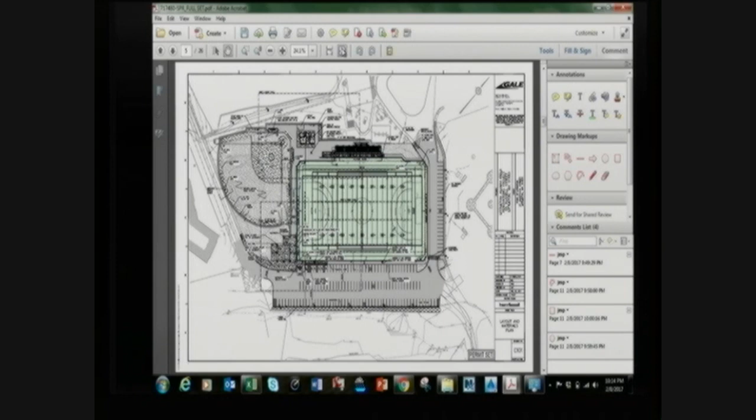Did you do any analytical for the soils, or did you just do geotech? When you did your borings? Just geotech. We do actually need to take some samples of the topsoil and send them out to a lab, so we can have the contractors know what they need, how they need to amend that.

So are we tallying that? What did we come up with? 30. Probably could have done this in Excel.

$80,000? Huh, 80 grand? I got 100. I got more than that. Yeah, good, I got 106, 30, and that's not taking anything away. 100 what? No, let me do an Excel. Cause that's not 106? I'm not taking away anything from the entrance. So that's, say, 30,000, if we can find that there. I got 130, huh? If we can, we've got that's 50,000, 15,000.

One minute. Let me just do this and do this. Should we just say I do 30,000 for the topsoil plus, if I do this plus this plus this plus this.

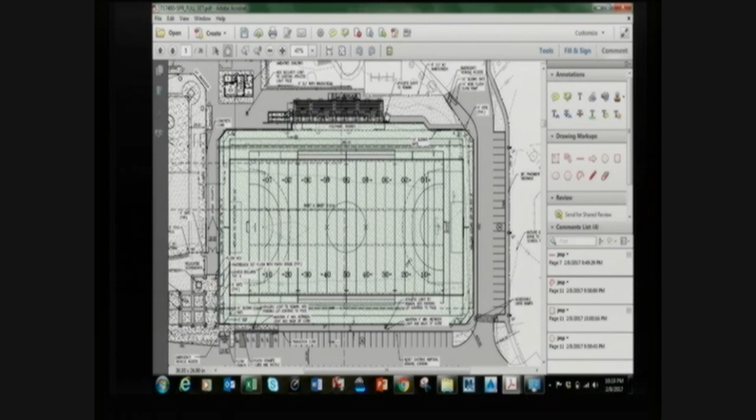When we have a system like this, what I would probably recommend is mounting the speakers on the press box. It's either mount them on the press box or mount them on the light poles. However, in this case, they're older light poles, I don't know what the structural capacity of them is. Press box is fine. Yeah, that's what we do now, mount them on the press box, one at each end. Yeah, typically one on each end.

Are there any special requirements? Should we give you basically a standard PA system that we've used at other sites similar to this? A good budget system? Yes.

Do you have a desire to have wireless capabilities, like a headset or microphone on the field? That would be great, but what kind of cost are we adding? It'd be great to do now since we're doing it now. You're adding probably $1,000 to $1,500. That's included for any kind of presentation, not that we do a whole lot of presentations, but senior night. I think the amount of use we're going to potentially get out of the field, I think it's worth including, at least for a remote microphone.

And then a filming platform on top of the press box? What does that entail? Right now we stand on the roof and film football. Can we do that, or do we need something different than a filming platform? You need a filming platform to do that. It's a modular piece that slaps onto the top of the roof. It's basically railings and a hatch with a ladder. We'll power it up there. We don't want them in the press box, it's gonna be too crowded. We want them higher, up top.